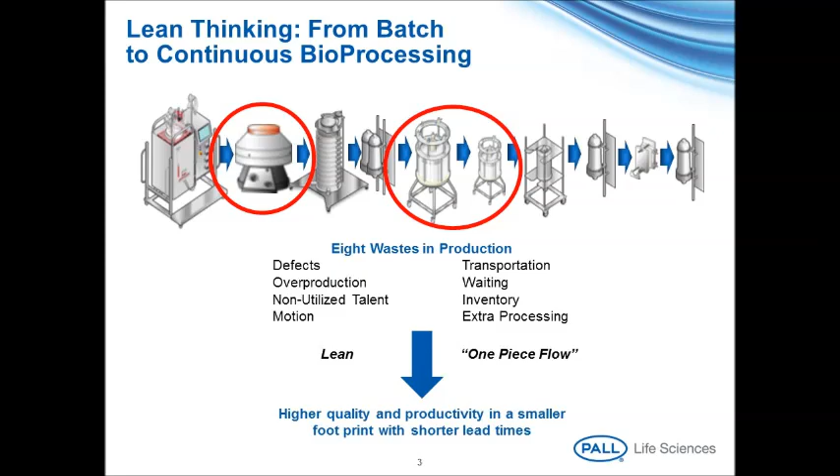And what is our vision? Our vision is to be the leading provider of integrated platform technologies for the continuous manufacturing of biologics. And we want to have a platform. You've already seen a photograph of the lab that we have. We want the platform to be robust across multiple molecules, and we're targeting more than 75% of biological molecules to be produced using a platform approach.

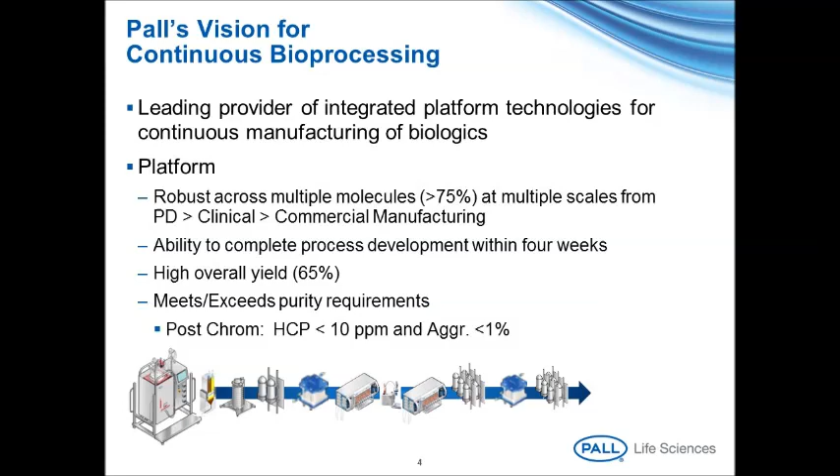It needs to be scalable so we can operate at process development through clinical phases into commercial manufacture. We'd like to be able to complete the entire process development plan within 4 weeks. We expect high overall yield, greater than 65% through a process. And we have to meet or exceed the current purity requirements that are expected in conventional batch processes. So to give you an example, for a monoclonal antibody, we would expect the host cell protein levels to be less than 10 parts per million, and aggregate content of less than 1%.

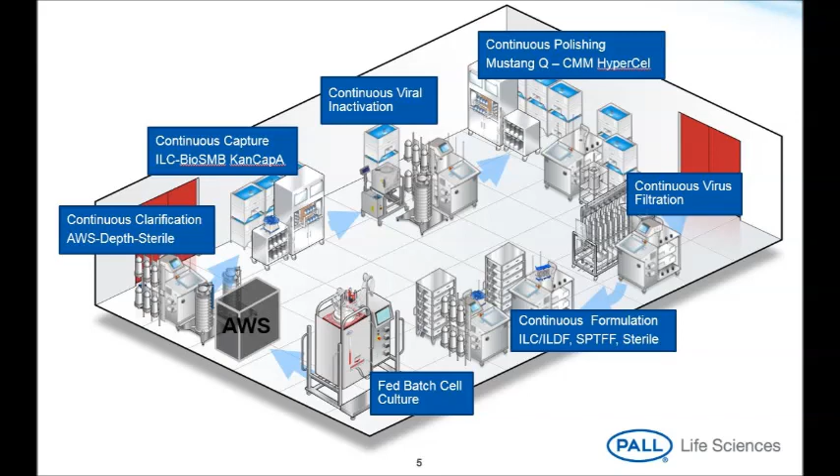And a continuous process will probably look something like this representation here. So you flow through from one unit operation to the next, and you effectively move from cell culture right through to formulated product in one continuous process. So I'm going to focus, as I mentioned before, on two areas. The first is the clarification area. I'm going to introduce to you today a new technique called acoustic wave separation, and we have in fact launched our first commercial product this very day at Interfex, and then I'll move on to look at the continuous chromatography.

So, acoustic wave separation. What exactly is it, and how does it work? Well, in this slide, you will understand, I hope, the principles. So we have a flow path through which fluid flows, and there's a transducer which generates an acoustic wave. The acoustic wave is low frequency, it is not ultrasound, and it passes across the flow channel and it reflects. And as it reflects back, it creates a series of nodes across the flow channel. But this is a three-dimensional wave, and it's also a standing wave. So you end up with a series of nodes across the flow path in three dimensions.

Cells then enter the flow channel from the bottom and flow upwards. And as they flow into the acoustic zone, the cells are trapped from the flow by the acoustic forces. And then they migrate to the nodes where the cells associate with each other and form clumps. And as the clumps get bigger and bigger, they effectively increase in density, such that the gravitational forces overcome the drag forces, which cause the cells to drop by sedimentation.

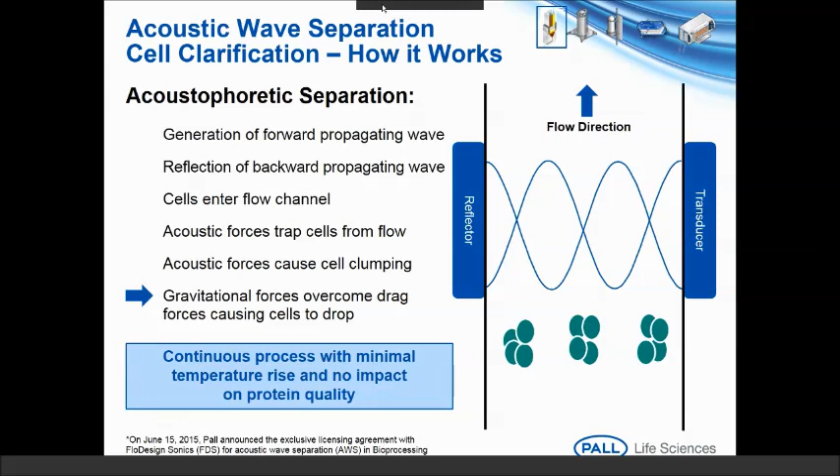And then you are ending up with a cell removal process. It's effectively a filterless filter. This is a continuous process. It has minimal temperature rise within the acoustic chamber, and we have seen no demonstrable impact on protein quality. So moving through the acoustic chamber, you get a partial clarification, which requires polishing by a secondary depth filtration.

And in this slide, what you can see is that if you take a conventional clarification process using depth filters alone, then as either the cell density increases or the cell viability increases, you have to use larger and larger filtration areas, proportionate to the cell density or the viability.

Whereas doing the initial clarification using the acoustic separation system, then we do a polishing with a secondary depth filter, and the amount of depth filtration area that you need is remarkably insensitive to the initial starting cell density or the cell viability. And typically we would expect to see a 75% reduction in the depth filtration area when used in conjunction with the acoustic separator compared to a depth filtration solution alone.

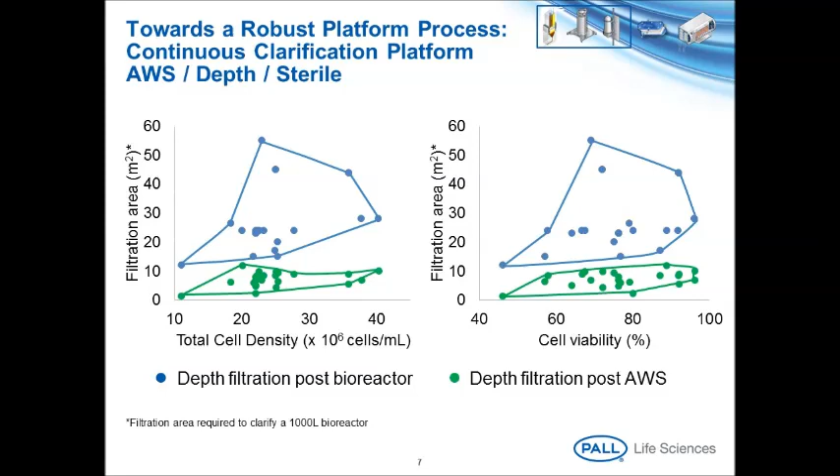So today we introduce the Cadence Acoustic Separator. This instrument will operate at between 3 and 4 litres an hour, and it is designed to clarify a 20-litre bioreactor within a working day.

However, fed batch is not the only method of cell culture. In continuous processing, perfusion culture is gaining significant growth and interest. So we're looking at developing an acoustic wave separation system for perfusion cell culture. And in fact, on the Interfex stand today, you will see a prototype of our perfusion device.

And this has different technical challenges. We need to be able to return the biomass back to the bioreactor. We need to be able to operate for up to 90 days. We have to maintain sterile conditions within the bioreactor. So these are all the technical challenges that we're currently working on, and our intention is to have a benchtop perfusion system available by a similar time next year.

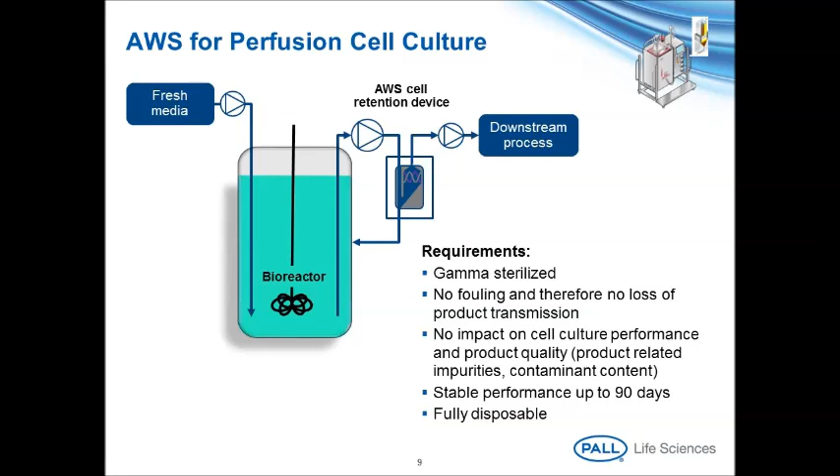So moving on from clarification, we now move to the continuous chromatography area. We introduced our BioSMB technology initially at benchtop scale using the BioSMB PD, but now are looking to expand it to a GMP process-capable system. So the PD system has a single-use disposable cassette that can handle up to 16 columns, and we have on our stand today a full-size model of our BioSMB process that is currently in the final stages of product development.

And this is an 8-column system. It will be able to process the contents of bioreactors of up to 2,000 litres in volume, and this will be commercially available later on during 2016.

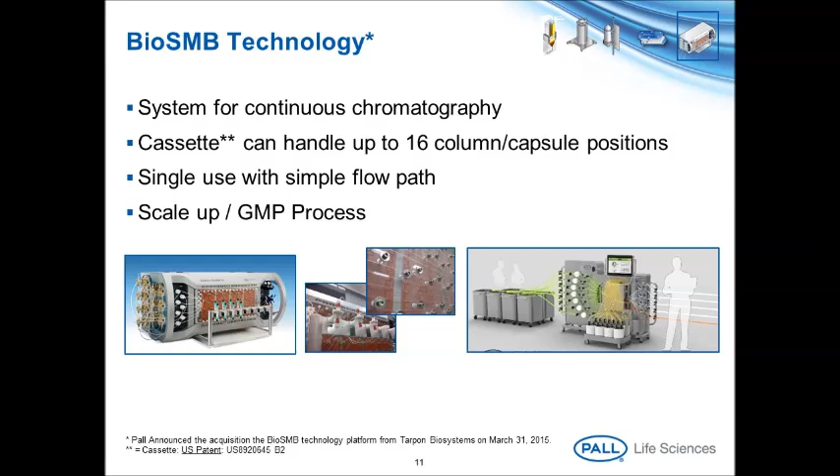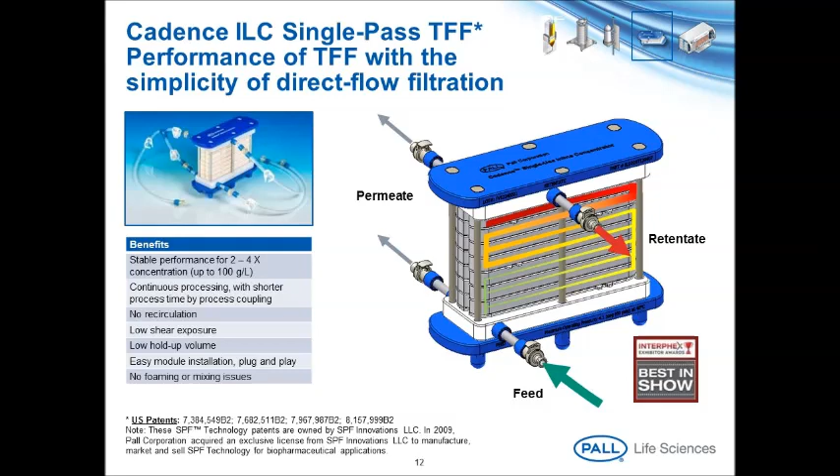And at Interphex in 2015, Pall won Best in Show for the inline concentrator. And the inline concentrator can be used in conjunction with capture chromatography to improve the efficiency of the chromatographic binding step. So in this slide, what we have done is put an inline concentrator ahead of the protein A capture.

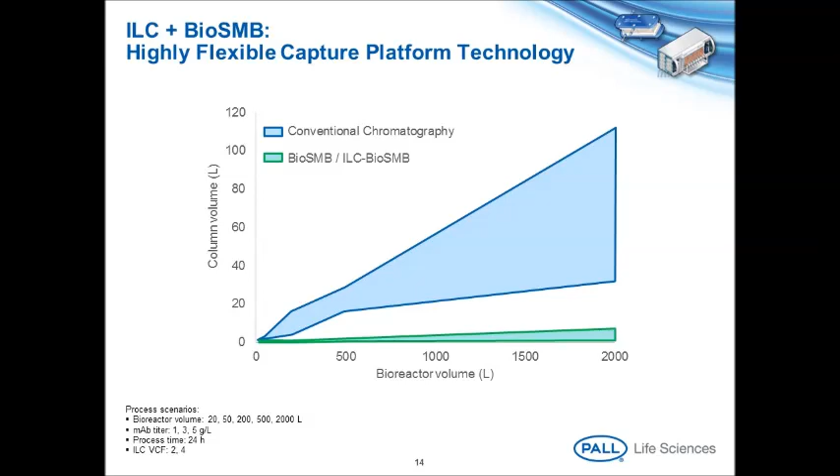If we then project what this would look like going forward to large scale, if we were running a 2,000 litre bioreactor, then in a conventional chromatographic mode, you would expect to be using protein A chromatography columns of 100 litres in volume or more, depending on the antibody titer and the flow rate that you operate. Whereas operating in a multi-column mode, the column volumes that you're using are of the order of only a few litres, and this has a tremendous economic advantage in terms of operating footprint, operating costs, and resin lifetime.

If we take this a stage further, one could even contemplate that in the early stage clinical manufacture, where you need a few hundred grams or maybe a kilogram of product to go into early phase clinical trials, you could, with a high titer system, nominally 5 grams per litre, maybe a 200 litre bioreactor, by using the BioSMB PD, you could produce approximately a kilogram of antibody per day on a benchtop system. So a lot of opportunities to look at different ways of approaching the chromatographic separation in a continuous mode and still giving you enough material of good enough quality to use in a clinical setting.

So how is this all progressing? How is the evolution going? Over the past 10 years, single-use has become a very key operating parameter, and now we hear of single-use facilities being constructed. Move that a stage further. Single-use enables you to intensify processes. The inline concentrator gives you a more intensified chromatographic process. We can integrate unit operations together. Bioreactor can go directly to the Cadence acoustic separator through its secondary depth filter through a sterilizing grade filter. We can integrate the concentration of the feed with the capture chromatography and then the viral inactivation.

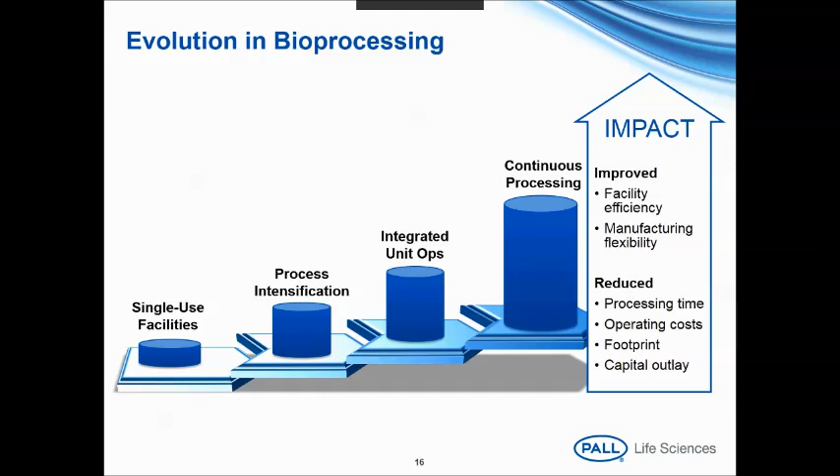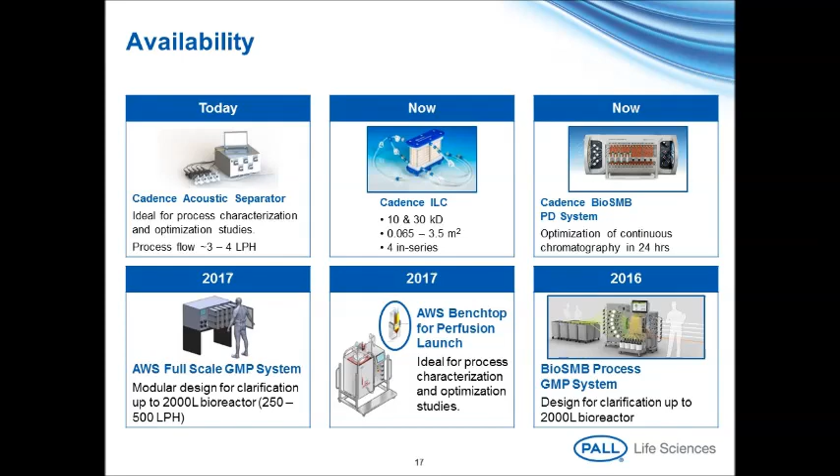So where are Pall today? Well, we have the Cadence acoustic separator, which is our first clarification product that we've launched today. We already have the Cadence inline concentrator. We have the Cadence BioSMB PD system. As I mentioned, we're looking to introduce full-scale GMP systems for fed batch clarification based on acoustic wave technology in 2017. And we will also introduce a benchtop system based on the same technology for perfusion applications next year. And in the latter quarter of 2016, we intend to introduce the BioSMB process, which will enable you to operate purification under GMP conditions in bioreactors of up to 2,000 litres in volume.

But we haven't finished there. There's more to come. We're working on process monitoring and control. We need to look at automation of the entire process operation. We have to be cognizant of validation and regulatory requirements and be responsive to those. And we need additional enabling technologies. So continuous viral inactivation is in development for process applications. We have virus filtration consumables already, but integrating those into a continuous viral filtration system. And finally, leveraging the single pass technologies to create inline diafiltration as a continuous unit operation as part of the buffer exchange prior to the final formulation filling operation. And these products are all in development and will be introduced over the next 12 to 18 months.